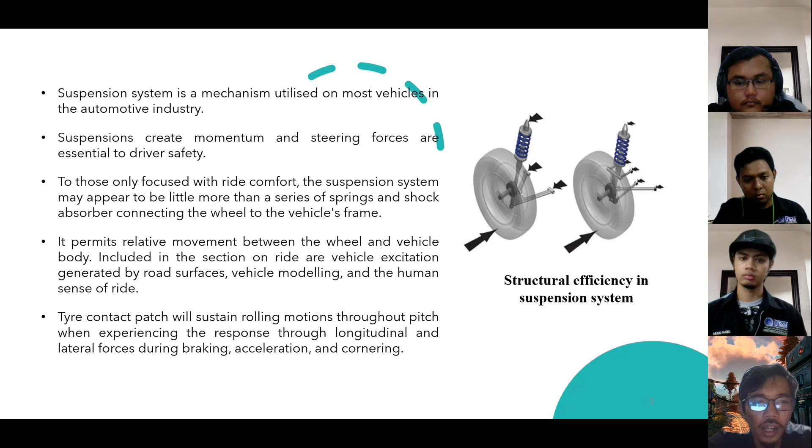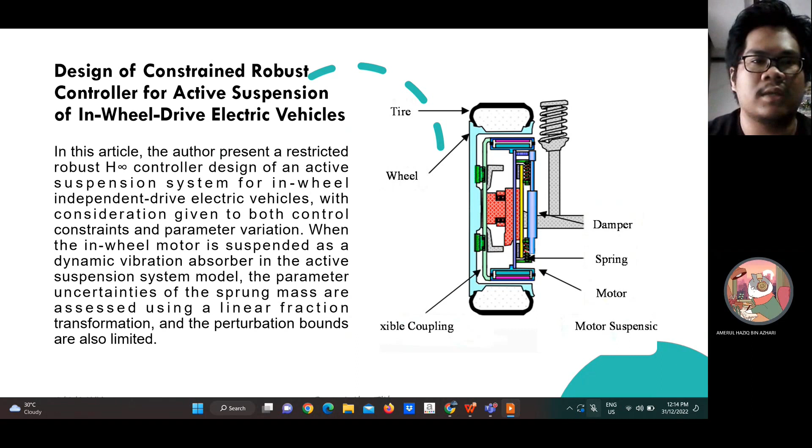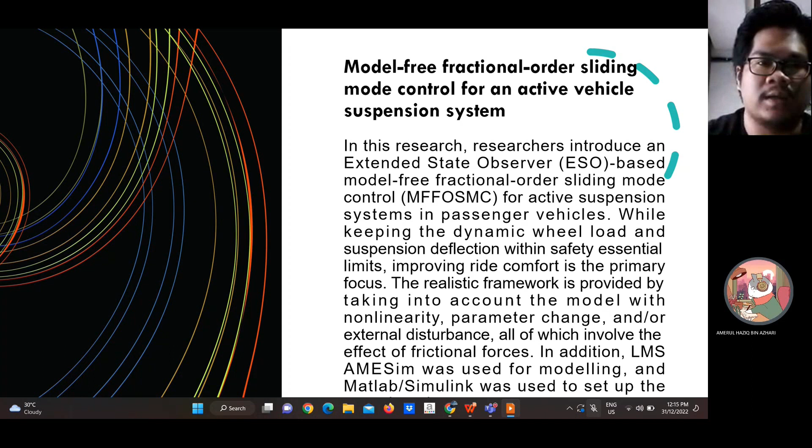So this is for me and from this slide. So we go for the next slide.

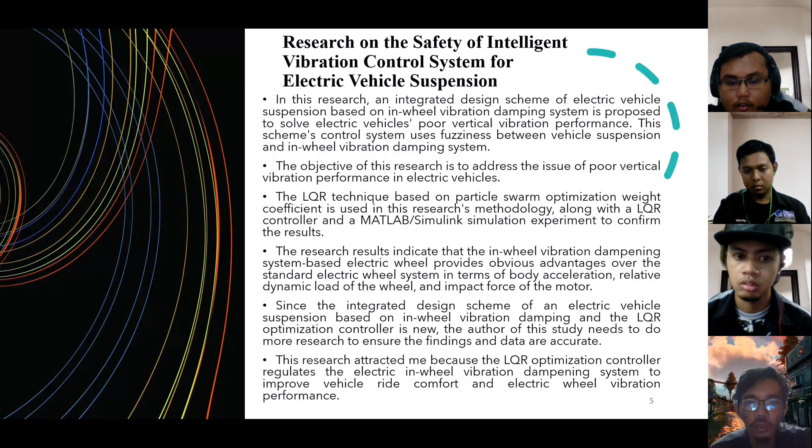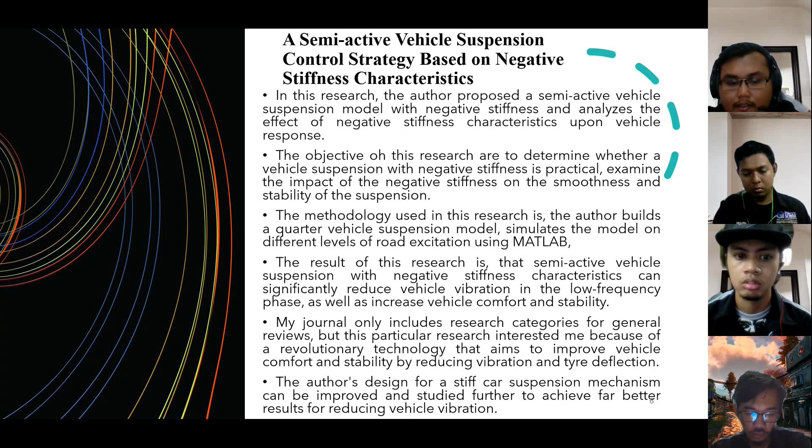My journal only includes research categories for general review, but this particular research interested me because of a revolutionary technology that aims to improve vehicle comfort and stability by reducing vibration and tire deflection. The author's design for a stiff car suspension mechanism can be improved and studied further to achieve far better results for reducing vehicle vibration. Okay, that's all for me.

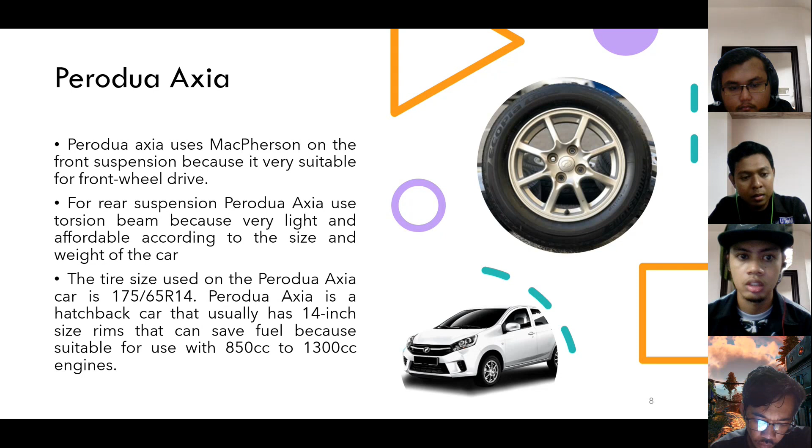usually has 14 inch rims that can save fuel because they are suitable for 850 cc to 1300 cc engines. So next, Proton Satria Neo. The front suspension of the Satria Neo uses MacPherson suspension because it's a front wheel drive car. For the rear suspension, the Neo uses a multi-link suspension that allows the wheels to combine both ride quality and handling.

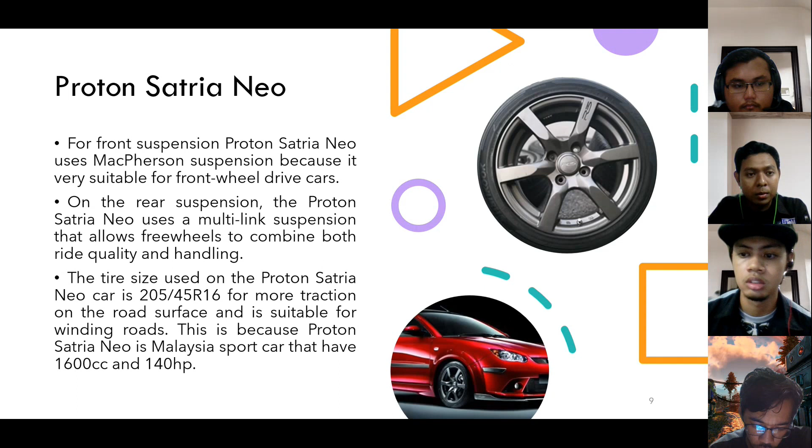The tire size used on the Proton Satria Neo car is 205/45, 16 inches, for more traction on the road surface, and it's suitable for winding roads. This is because the Proton Satria Neo is a Malaysian sport car that has 1600 cc and 140 horsepower. So the last car is the Subaru WRX.

So the front suspension uses MacPherson suspension, that's suitable for front wheel drive vehicles, but the Subaru uses all-wheel drive, where it turns the front and rear wheels simultaneously and continuously. The rear suspension used by the Subaru WRX is a double wishbone, which is very suitable for use on segment C and segment D and all-wheel drive cars, because the double wishbone allows for great control over camber, caster, and roll.

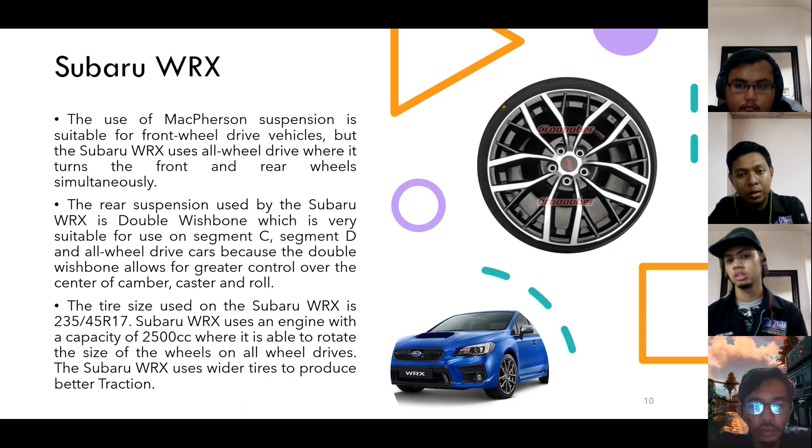The tire size used on the Subaru WRX is 235/45, 17 inches. So the Subaru WRX uses an engine with a capacity of 2500 cc, where it's able to rotate the size of the wheel on all-wheel drive. The Subaru WRX uses wider tires to produce better traction. So that's all my task.

Okay, I will give to my friend Sonex. Alright.

Alright. For the task discussion and proposal. Okay, my name is Mohamad Nabil, and I'm going to start. So after considering a few alternatives to a more advanced suspension system, we have decided to propose a semi-active suspension system that will improve our case study and will give more impact on vehicle manufacturing.

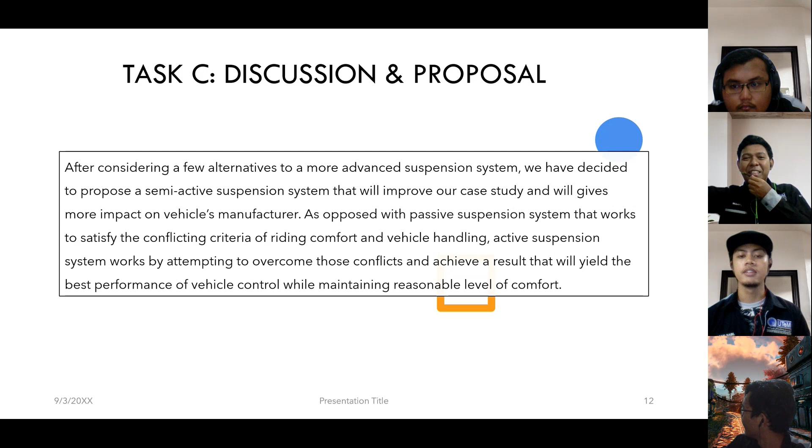So, as opposed to a passive suspension system that works to satisfy the conflicting criteria of ride comfort and vehicle handling, an active suspension system works by attempting to overcome those conflicts and achieve a result that will yield the best performance of the vehicle while maintaining a reasonable level of comfort. Okay, so the semi-active suspension system. We have selected the continuous damping control system.

So CDC, or continuous damping control, is a semi-active suspension system that adapts the vehicle damping in accordance with the driving situations and road conditions. The system will continuously monitor wheel movements and immediately adjust the damping of every shock absorber.

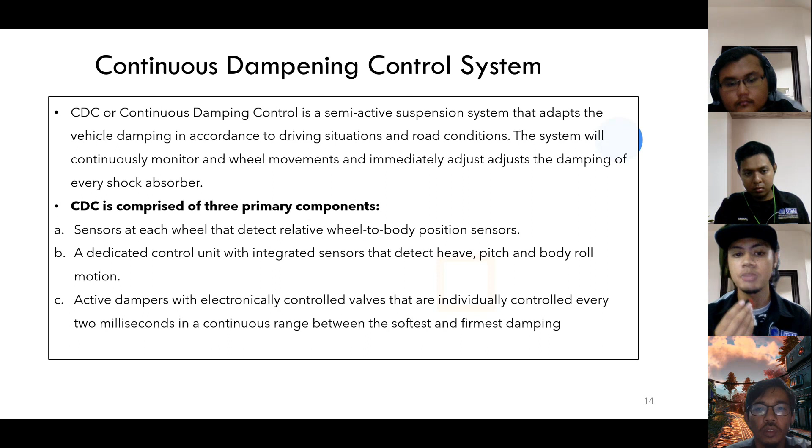So the CDC is comprised of three primary components: the sensors at each wheel that detect relative wheel to body position, a dedicated control unit with integrated sensors that detect heave, pitch and body roll motion, and the active dampers, with electronically controlled valves that are individually controlled every 2 milliseconds in a continuous range between the softest and firmest damping. Okay, so next.

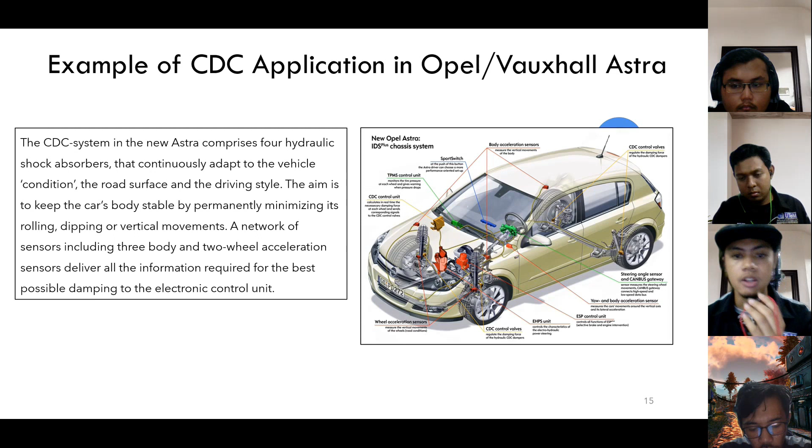So the example of CDC application in the Opel or Vauxhall Astra. This is the example of the CDC system installed in a vehicle today. The CDC system in the new Astra is comprised of 4 hydraulic shock absorbers that continuously adapt to the vehicle condition, the road surface, and the driving style. The aim is to keep the car stable by minimizing its rolling, dipping, or vertical movements. A network of sensors delivers all the information to the electronic control unit. There are the CDC control valves and the CDC control unit. The sport switch determines whether we prioritize comfort or performance. Okay, so next.

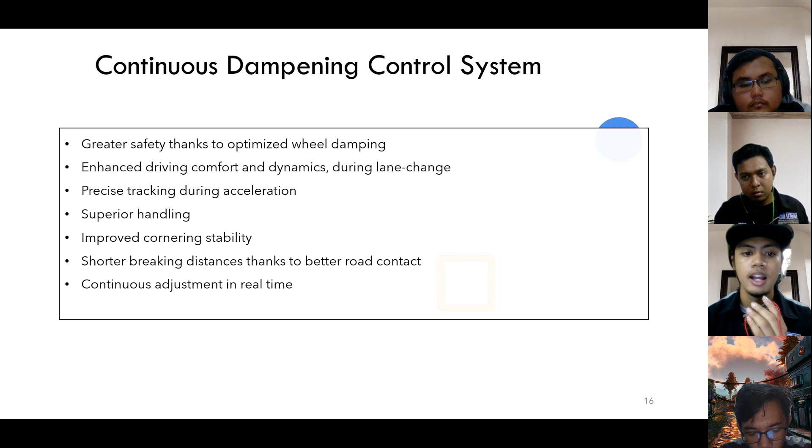Okay, so the advantage of the continuous damping control system is that it has greater safety thanks to optimized wheel damping. It enhances driving comfort and dynamics, especially during lane changes. It has precise tracking during acceleration. It has superior handling. It improves cornering stability. It has shorter braking distance thanks to better road contact. And it also continuously adjusts in real time. Okay, that's all from me.

Okay, I'm going to pass to the next group member. Okay, so thank you.

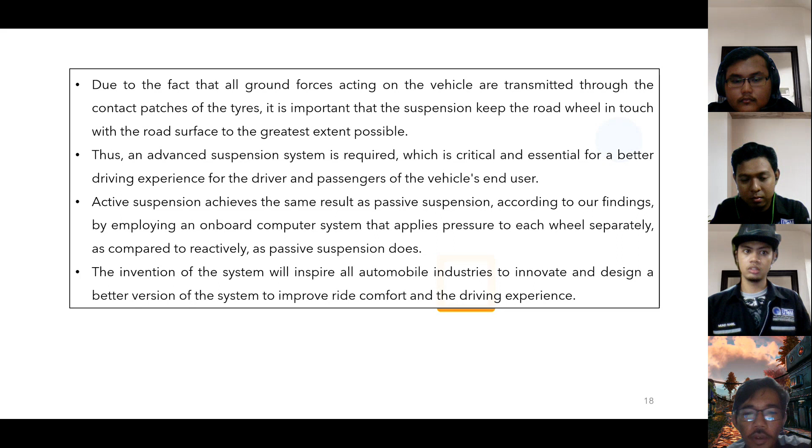Iteration of the system to improve ride comfort and driving experience. Okay, thank you.